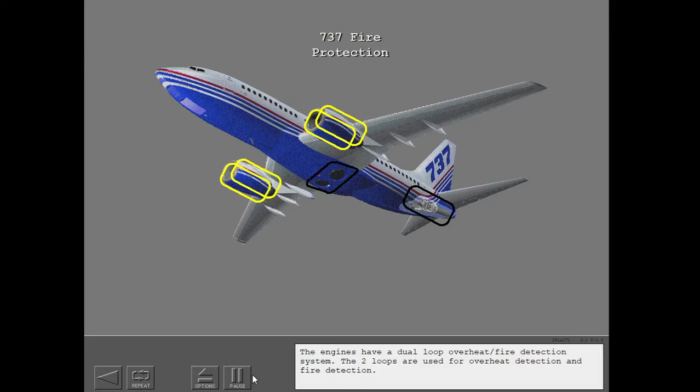The APU fire detection system operates independently of the engine system. It operates the same as the engine system, but uses one loop for fire detection. There is no overheat detection capability for the APU.

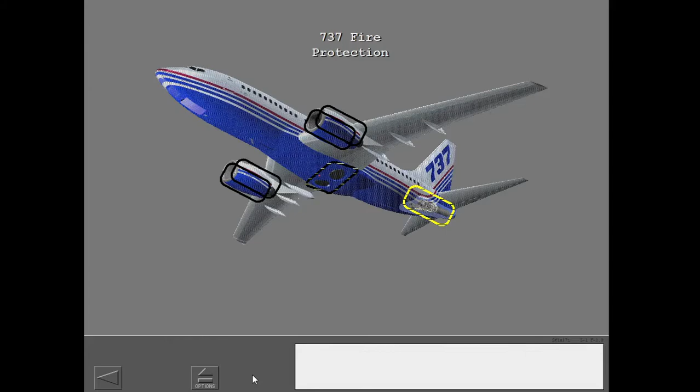The main wheel well fire detection system is a one-loop system. It operates the same way as the engine fire detection system.

There are two fire extinguisher bottles for the engines. Each bottle can be used only one time. One or two bottles can be used on an engine fire. There is one fire bottle for the APU.

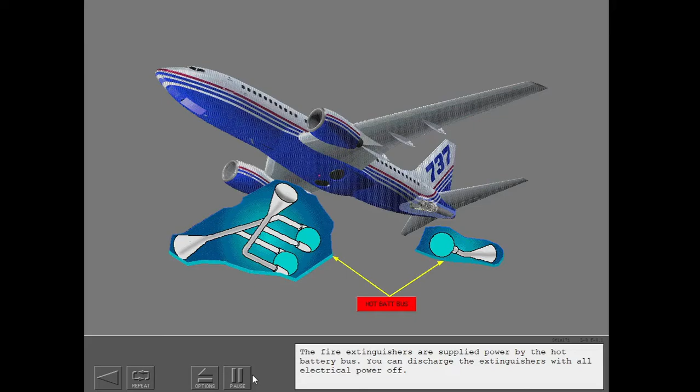The fire extinguishers are supplied power by the hot battery bus. You can discharge the extinguishers with all electrical power off.

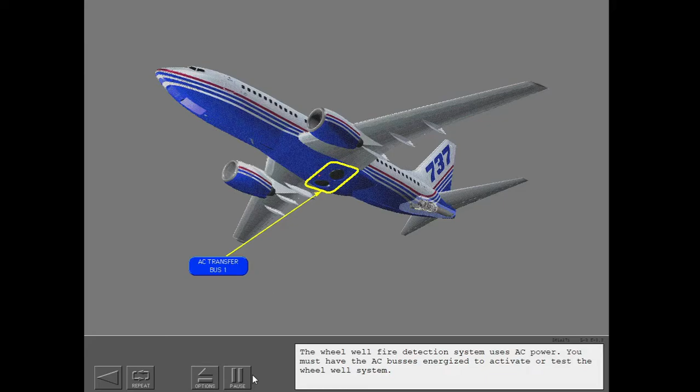The engine and APU overheat fire detection systems are powered by the battery bus. The wheel well fire detection system uses AC power. You must have the AC buses energized to activate or test the wheel well system.

The cargo compartment fire protection system consists of two systems: cargo compartment smoke detection, and cargo compartment fire extinguishing.

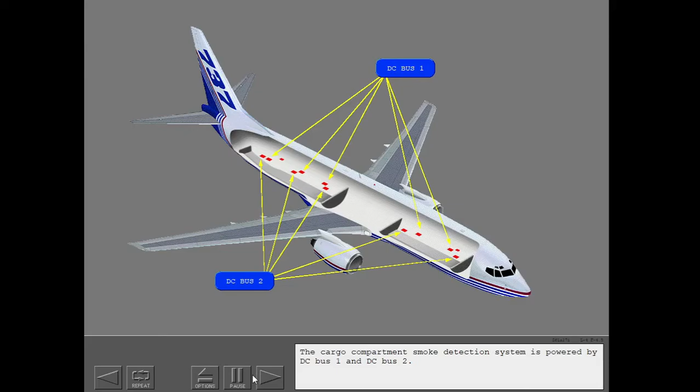The cargo compartment smoke detection system is powered by DC bus 1 and DC bus 2. The cargo compartment fire extinguishing system is powered by the hot battery bus. There is also fire protection equipment in the lavatories.

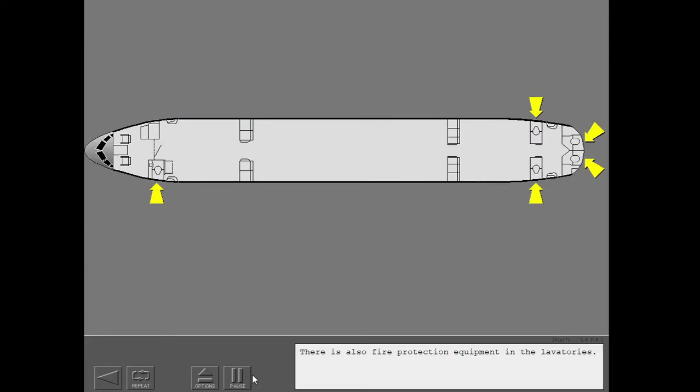Overheat and fire indications are shown on the flight deck on the overheat fire protection panel, cargo fire panel, and the master caution fire panel. A fire bell is installed to give an aural alert when a fire is detected.

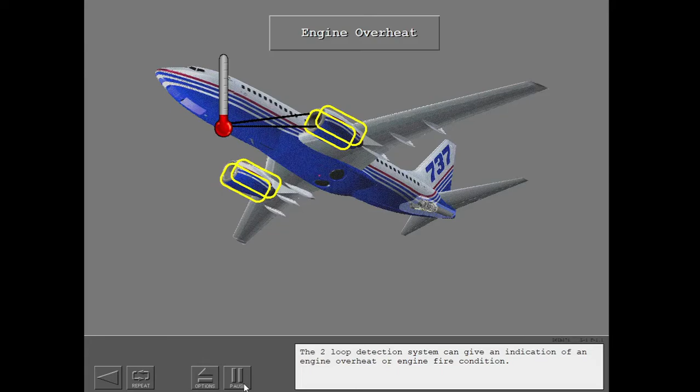The two-loop detection system can give an indication of an engine overheat or engine fire condition. The engine overheat light illuminates at a lower temperature than occurs with a fire. Normally, the two loops must send overheat signals for the light to illuminate.

An overheat has occurred in the number 1 engine. The master caution lights, the overheat detect light, and the related engine overheat light illuminate.

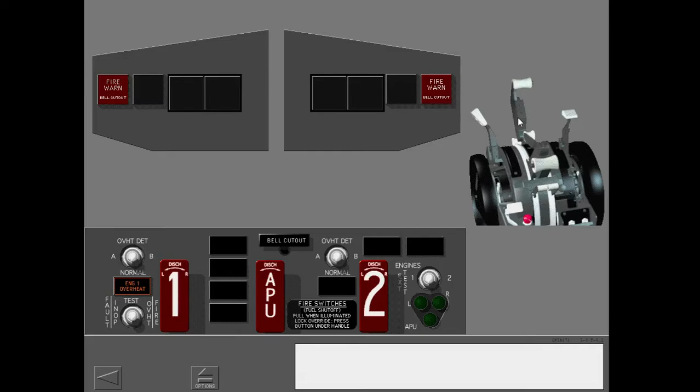Push the master caution light to extinguish the light and reset the master caution system. Move the thrust lever back to reduce the engine temperature. When the overheat condition is gone, the overheat indications are removed.

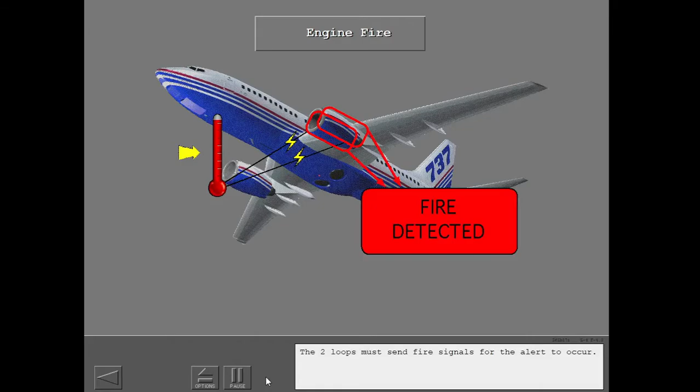The system receives the signal that an engine fire exists. The fire detection system operates the same for an engine fire as it does for an overheat. An engine fire indication occurs at a higher temperature than for an overheat condition. The two loops must send fire signals for the alert to occur.

There is a fire in the number 1 engine. These are the indications of an engine fire. The fire warning bell operates. The master fire warning lights, the master caution lights, and the overheat detect light illuminate. The related engine fire warning switch and the engine overheat light illuminate on the overheat fire protection panel.

Push a master fire warning light or the fire warning bell cutout switch to stop the fire bell and reset the system. Now reset the master caution system.

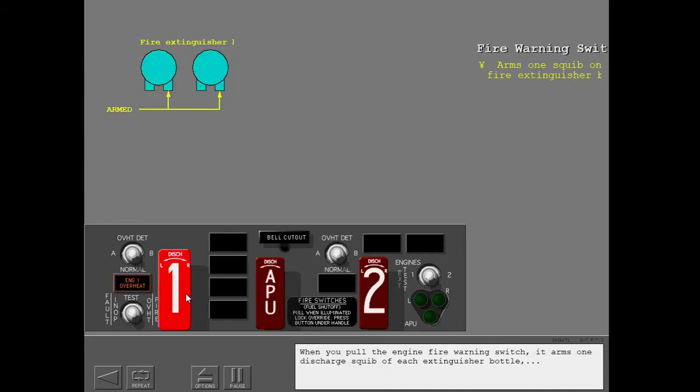Pull the engine number 1 fire warning switch. When you pull the engine fire warning switch, it arms one discharge squib of each extinguisher bottle.

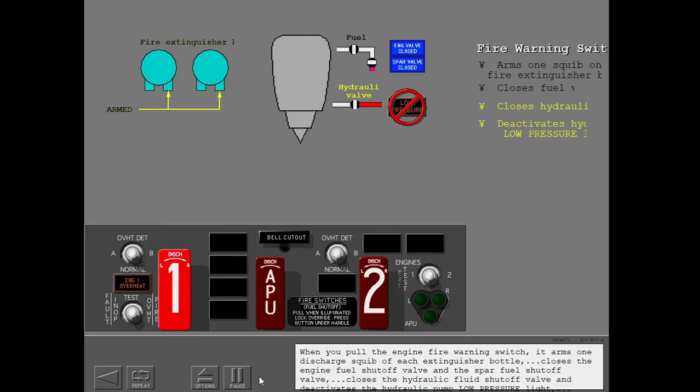Closes the engine fuel shutoff valve and the spar fuel shutoff valve. Closes the hydraulic fluid shutoff valve and deactivates the hydraulic pump low pressure light. Closes the engine bleed air valve.

Trips the generator relay and generator breaker, and prevents the use of reverse thrust for that engine.

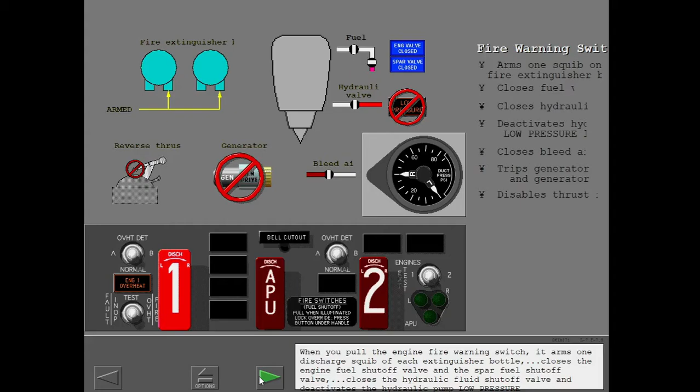After you pull the engine fire warning switch, you turn the switch in one direction to discharge the selected fire bottle. Now turn the number 1 fire warning switch.

After a short delay, the related bottle discharge light illuminates to show that the bottle has discharged. Turn the fire warning switch in the opposite direction to discharge the other fire extinguisher bottle. After a short delay, the other bottle discharge light illuminates.

The red light in the engine fire warning switch extinguishes when the temperature decreases below the fire warning activation temperature. The engine overheat light extinguishes when the overheat condition is gone. The engine fire warning switch for the other engine operates the same.

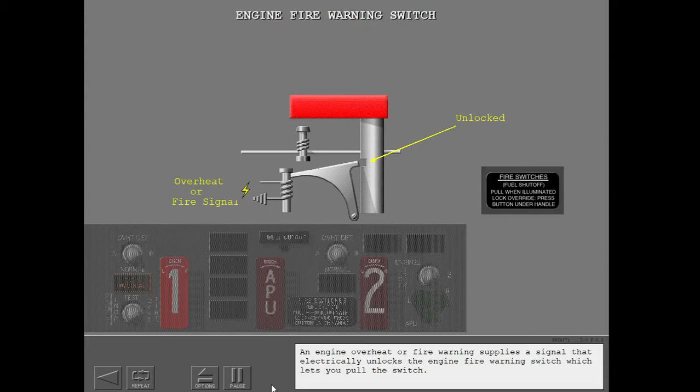The engine fire warning switch is usually locked down. An engine overheat or fire warning supplies a signal that electrically unlocks the engine fire warning switch, which lets you pull the switch.

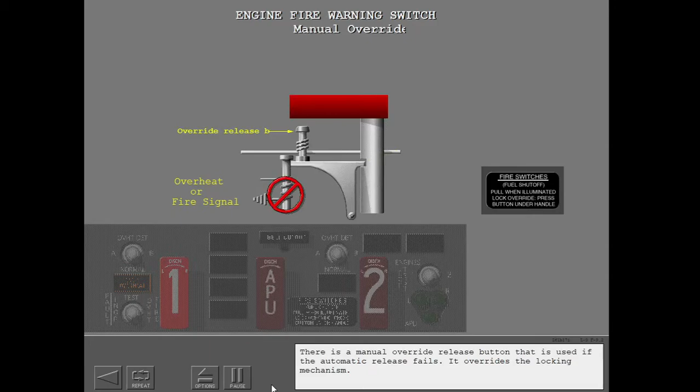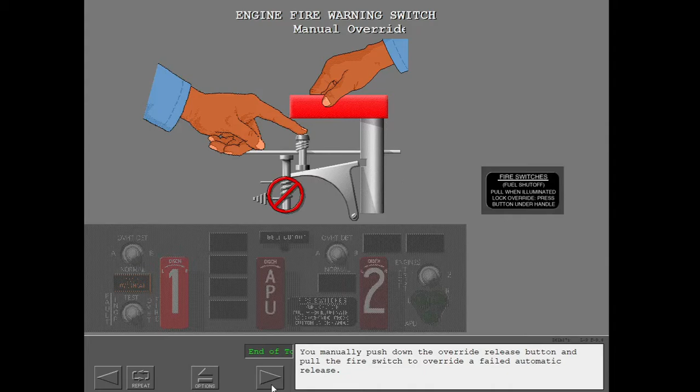There is a manual override release button that is used if the automatic release fails. It overrides the locking mechanism. You manually push down the override release button and pull the fire switch to override a failed automatic release.

APU fire detection operates independently of the engine system. It operates the same as the engine system, but contains only one loop for fire detection. Normally, if an APU fire is detected, the APU shuts down automatically.

There is a fire in the APU. These are the flight deck indications of an APU fire. The fire warning bell operates. The master fire warning lights illuminate.

The APU fire detection system is for fire only. The master caution and overheat detect annunciator lights do not illuminate. The APU fire warning switch illuminates on the overheat fire protection panel.

Stop the fire warning bell and reset the system. Pull the APU fire warning switch.

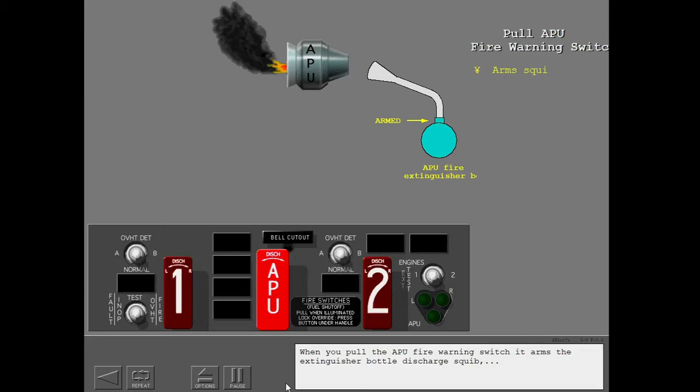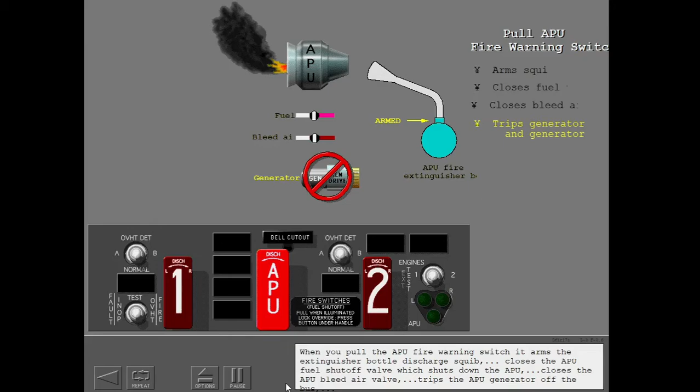When you pull the APU fire warning switch, it arms the extinguisher bottle discharge squib, closes the APU fuel shutoff valve which shuts down the APU, closes the APU bleed air valve, trips the APU generator off the bus, and closes the APU air inlet door.

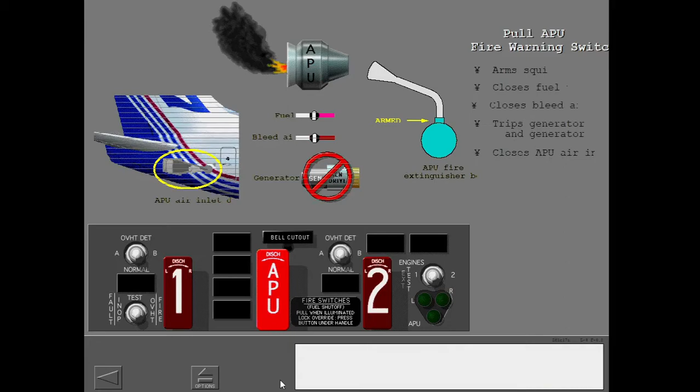You can turn the APU fire warning switch to the left or right to discharge the fire bottle. Now turn the APU fire warning switch. After a short delay, the APU bottle discharge light illuminates.

The red light in the APU fire warning switch extinguishes when the temperature cools below the fire activation temperature.

An APU fire can also be extinguished from the APU ground control panel located in the main wheel well. There is an APU fire warning horn in the wheel well that operates when there is an APU fire. It is heard at the same time as the fire warning bell in the flight deck.

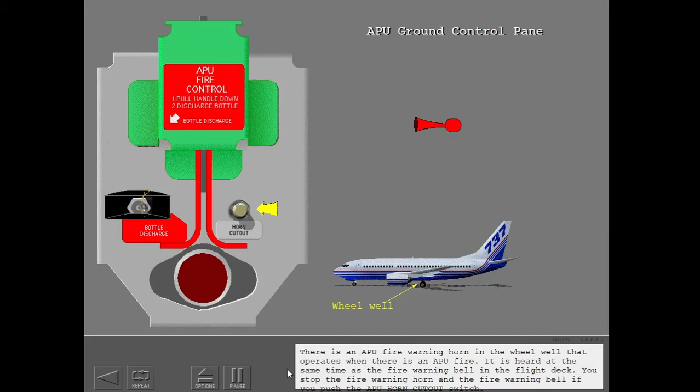You stop the fire warning horn and the fire warning bell if you push the APU horn cutout switch. Also, there is an APU fire warning light that flashes when there is a fire.

There is an APU fire. The APU automatically shuts down when there is a fire. If the fire continues, pull the fire control handle to the down position to make sure the APU is shut down. Now, pull down the fire control handle.

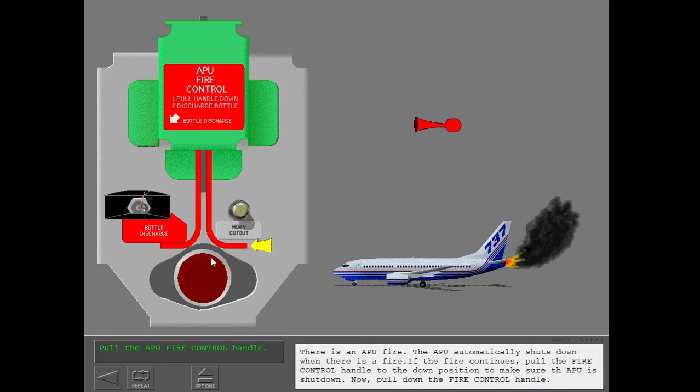When you pull the fire control handle in the wheel well, it is the same as if you pulled the APU fire warning switch in the flight deck.

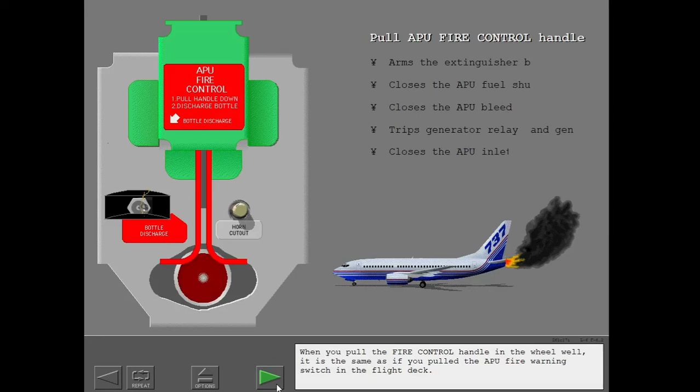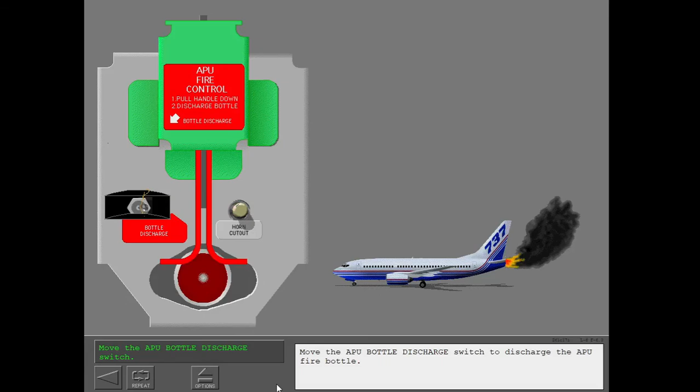Move the APU bottle discharge switch to discharge the APU fire bottle. When the loop cools, the APU fire warning light extinguishes.

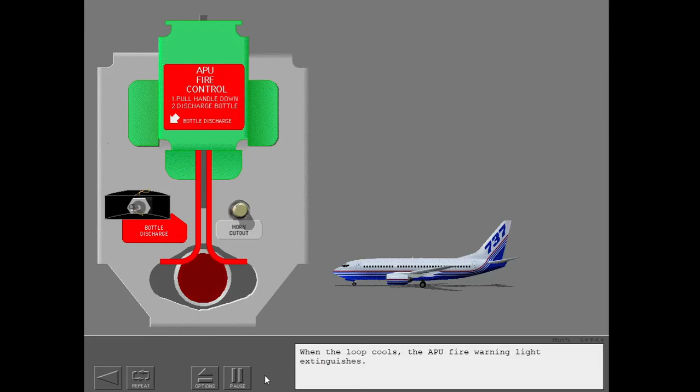The main wheel well fire detection system uses one detector loop in the main landing gear wheel well. The system detects a wheel well fire.

The wheel well fire indications are: the fire warning bell operates, the master fire warning lights, and the wheel well fire warning light illuminate.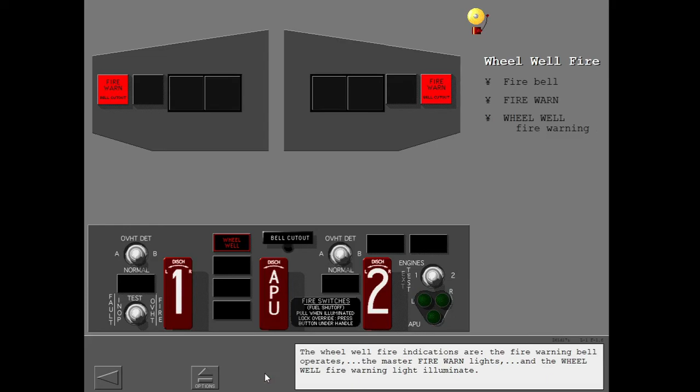Push the master fire warning light or the bell cutout switch to stop the fire warning bell and reset the system.

A wheel well fire is extinguished by airflow. There are no fire extinguishers for the wheel well. You lower the landing gear to let air flow through the wheel well.

Airspeed must be below the maximum landing gear extension speed before you lower the landing gear. Lower the landing gear.

When the detector loop cools, the wheel well fire warning light extinguishes.